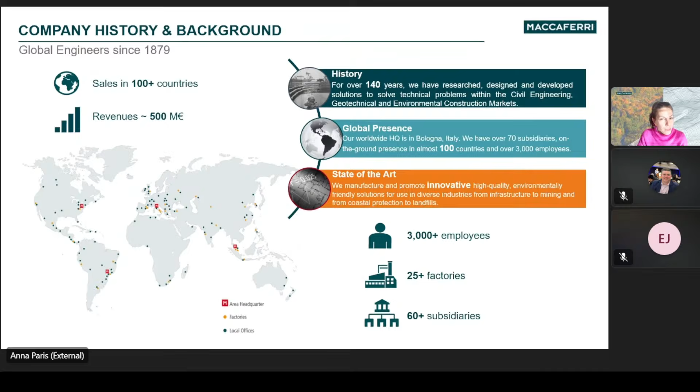The history of Maccaferri and erosion control started in 1894 with an innovative solution: the gabion basket. At that time, there was a riverbank breach, a damaged riverbank, and they came up with the idea of using these baskets, filling them with rock, and reconstructing the riverbank. If you go today to that spot in Casalecchio along the Reno River, close to Bologna, you will still see those gabions.

It's an old technology, and obviously the technology has evolved. You might see some rust on the wire because it was pure steel, but it's still there, still holding up, and very nicely integrated with the landscape.

Today, Maccaferri offers a very broad portfolio of solutions, from rockfall mitigation products all the way to pavement reinforcement with geosynthetics. We have a whole bunch of earth and soil retaining systems, from MSE walls to reinforced soil slopes with the green Terramesh, and then the classic gabion gravity wall. Today, we will focus on hydraulic works and a software that can support the channel erosion protection design.

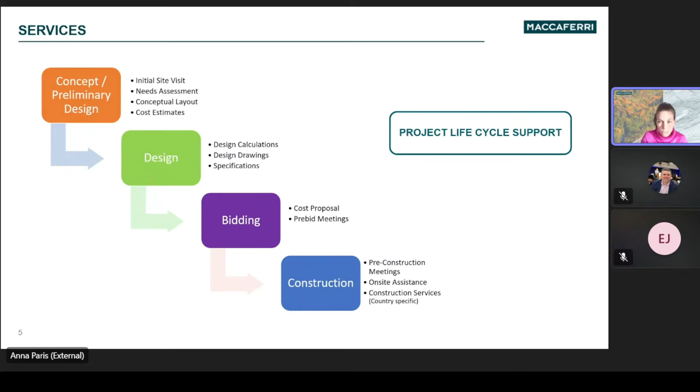Today, our focus is to discuss the software we have developed that can help you find an effective erosion protection system for a channel. The software is called MacRA Design. We're going to go through a quick introduction, seeing the capabilities of the software, then go to the data workflow, and then jump into a live demonstration. I'll show you how to use the software, and you're free to try it yourself. I'll show you the link, and we'll do a little trial, a design example and comparison with riprap, and then we'll see a couple of recent projects we have done. At the very end, we'll talk about questions and answers.

Let me start with a guess. If you're here today, you have probably found yourself wondering, in one of your projects, what could be an effective way to protect a riverbank, a spillway, or even a small beach from erosion. Maybe you have just a little information on the geometry and hydraulics of a channel, and you're wondering how to estimate the erosive forces. Or maybe you have already built your 2D models and know the distribution of shear stress, but you're not sure what kind of erosion protection system to propose to your client.

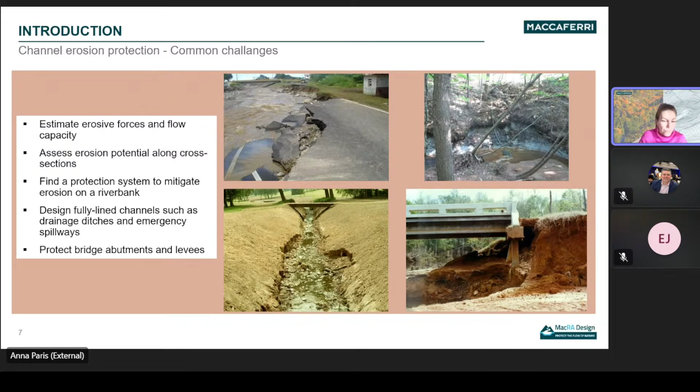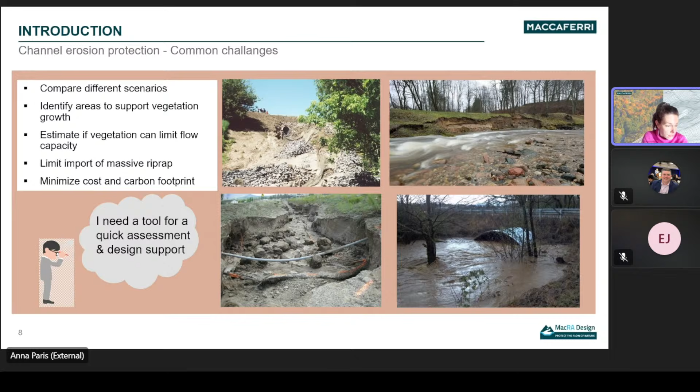And maybe you want to propose an alternative to riprap. Maybe you would like to compare different scenarios and identify areas in your cross-section that can support vegetation growth and enhance the ecosystem. Or maybe your calculation requires a big size riprap that's not locally available, and you're looking for a more cost-effective solution. With all these challenges in mind, we have developed this simple tool for a quick assessment that can support your channel design.

So the software MacRA Design can support either the design of channel and bank protection or grade control structures. Some of you may be familiar with the ancestors of MacRA Design. For many years, engineers have been using MacRA 1 or MacRA Studio for channel design and MacRA 2 for grade control structures. Now, MacRA Design is the latest version of this software, with many improved features, a wider material database, and a much more modern, user-friendly interface.

MacRA Design is a very simple and fast tool that can help you determine the erosive forces along the channel cross-section and compare the resistance of different materials picked from a database. You can combine natural and engineered erosion protection systems along the cross-section and compare the results with vegetated and non-vegetated solutions.

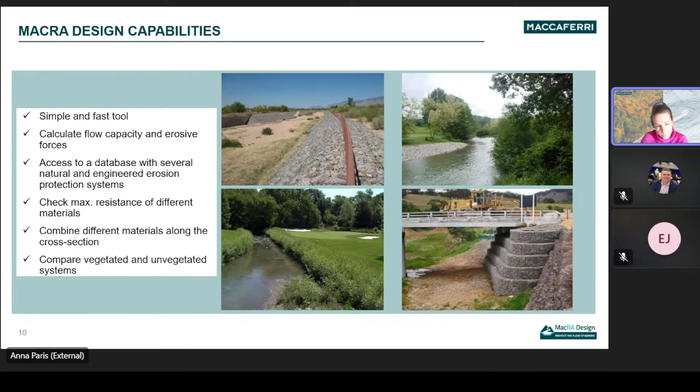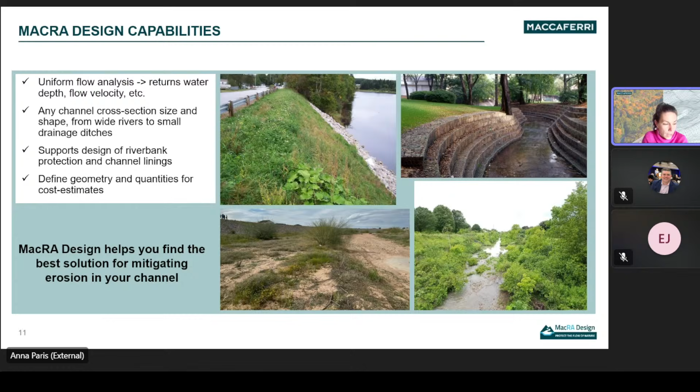The software runs a uniform flow analysis and returns water depth and flow velocity, allowing for flow capacity optimization, for example by modifying the cross-section geometry. You can model any kind of cross-section size and shape, from wide rivers to small drainage ditches. The purpose of MacRA Design is to support your design of riverbank protection systems and channel linings to mitigate erosion.

The software has a modern and intuitive interface. It requires only a few input data and returns results in a very nicely organized manner. It also creates a summary report available for download if you wish. You can pick between 10 languages and choose whether to use the metric system or the imperial system.

So additionally, and more importantly, MacRA Design is an online design software suite. That means you do not need to download it. You can use it just with an internet connection. You just need to create an account and you will have access to this tool and your own projects from anywhere.

In this way, you will always have access to the latest version of the software instantly, and there is no need to waste time searching for updates or take space from your computer memory. The software is available for use at edesign.maccaferri.com.

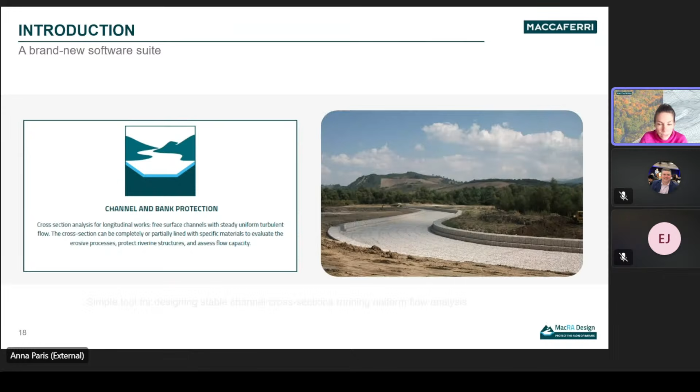So MacRA Design gives you both the options of designing channel and bank protection or grade control structures. Today we focus on channel and bank protection. Just remember, this tool is for designing stable channel cross sections running uniform flow analysis.

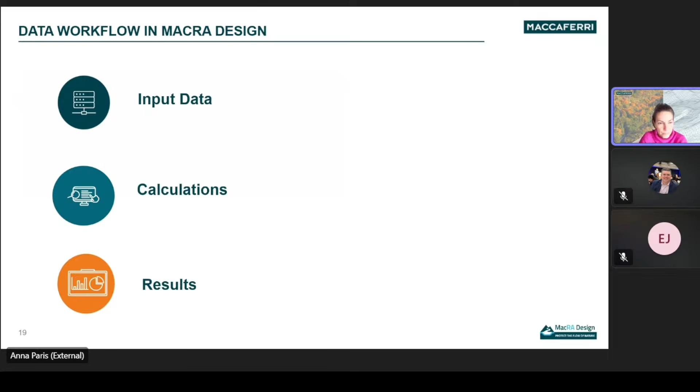So now let's check a little bit the data workflow, from input data, then the equations, the calculation, the approach, and then the results, how they look. So starting from input data, the information that the software requires is the geometry of the cross-section, some hydraulic data such as discharge and the slope of your channel in that area, and then you will need to associate to each part of your cross-section a certain material.

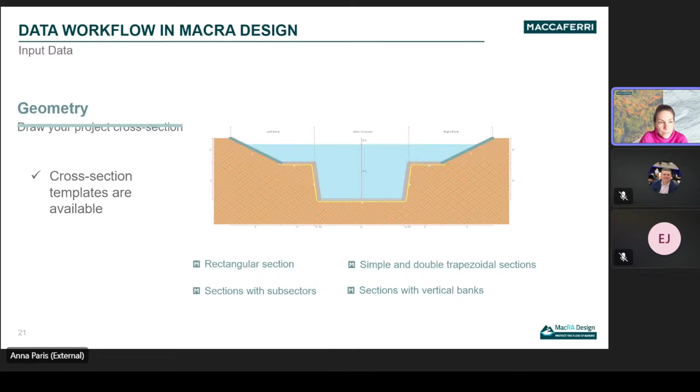Starting from geometry, basically the software offers some templates you can click on, and then you can start from that one and modify it. That's the first step. Then you will need to add the flow rate and the channel bed slope. And last but not least, you will need to associate each part of the cross-section to a certain material. There's a database inside that is divided in 3 categories: natural soils, natural vegetation, and protection systems.

So for natural soil and natural vegetation, you will see some different types of soil and vegetation, and the information that the software has in the database, in terms of shear stress and Manning's coefficient, comes from literature. On the other side, for protection systems, you will see different engineered systems, such as the option to select riprap, or different products for erosion control systems or earth retaining systems.

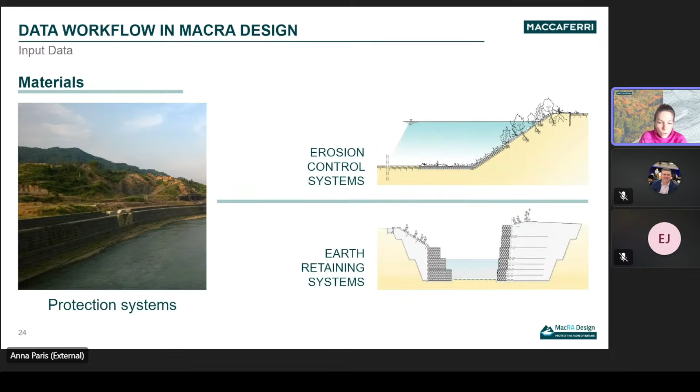Starting from erosion protection systems, there's a product inside called Maccaferri MacMat, a turf reinforcement mat. This is the type of product you would use when you have a mild sloped bank that is stable from a geotechnical point of view, but needs help with the erosion. It's kind of a soft armor vegetative solution.

The product itself is made with steel double twisted wire mesh, and has a 3-dimensional polymer matrix all around. This supports vegetation growth through it and works together with the vegetation to prevent erosion. This product is typically used in the upper part of the bank, on levees or small drainage ditches that are dry most of the time and carry water only during storms. So you need an environment where the vegetation can grow through it.

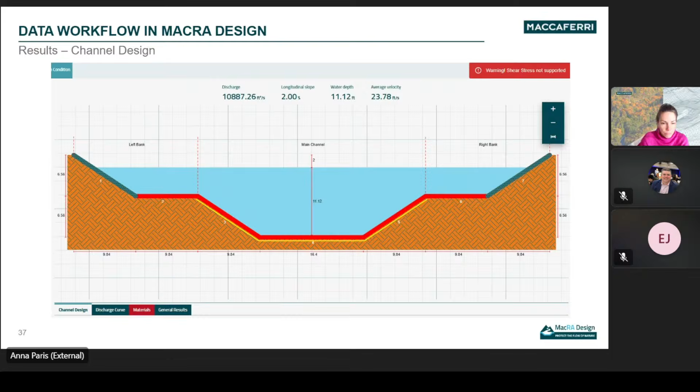And then you can go inside the material tab and check each part of your cross-section, what's going on in each part of your cross-section. What is the applied shear stress, the calculated shear stress, and allowed. And if it's red, typically the calculated is higher than the allowed. So you need to work and try to find a better product, a better solution.

Okay, so now let's jump in the MacRA design live demonstration. Let's try it. Feel free, if you want, to go on the website edesign.maccaferri.com and click on MacRA design. You can sign up if you haven't done it yet. Pretty quick, straightforward process. And then maybe you can follow me as I demonstrate the software.

So let me share my web page. So, share window. All right, here we go.

So when you log in MacRA, this is the page you will land. So basically, here you see a list of recent projects. These are projects I worked on before. If you're new, you will see nothing here, just new project right here. On the top left, you have open. So in case you want to open a certain file from the cloud, or even if you have downloaded a file, you can open that from there.

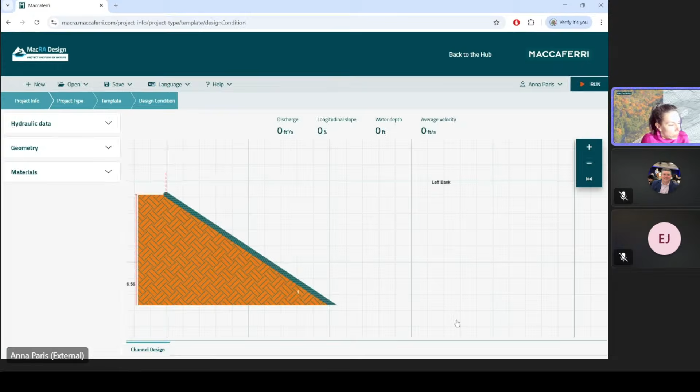Then you click next. Here you're going to choose either channel lining protection or grade control structures. For today's demonstration, we'll focus on channel lining protection. We click next. And then here you have available different templates, different cross sections. You can pick whatever is close enough to your project cross section. So let's say this one, trapezoidal. And then I'm going to select the unit system imperial. You can choose metric if you want. Now we go next. And here we go.

So now you see on the left side, you have all the drop-down menus where you need to add information. So in this case, you can select discharge, and then you can add the value of your flow rate. You can also potentially create an automatic discharge based on your cross-section and the freeboard. It will automatically calculate the discharge for that freeboard. But let's leave it like that for now, freeboard, and then longitudinal slope. So this is how steep your channel is in this area.

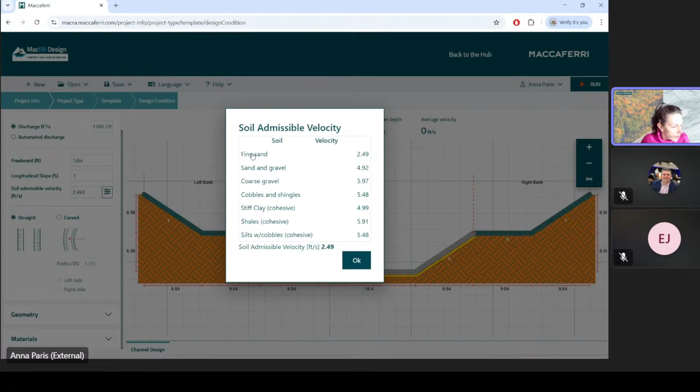Let's leave 1%. Then soil admissible velocity. So this is more what kind of soil you have on site. If you click here, it gives you different options, from fine sand to cobbles and shingles. If you don't know exactly what you have, the most conservative is fine sand because it's the most erodible. So you will select fine sand. Okay.

Then you could choose to design a straight channel or a curved channel. Let's say you're designing the outside bank of a stream that is being eroded. You need to fix it. You will choose curve and then add the radius of curvature of that bend. For now, let's keep it straight. So now we are done with the hydraulics, and now we're going to go to geometry.

So geometry, here you can see in this drawing, each part of your cross-section has a number: 1, 2, 3, 4, 5, 6, 7. So when you select sector 1 from this drop-down menu, it means you are working on this. Now you can change the geometry, for example. Instead of 1.5 to 1, I can choose 3 to 1. And then boom, it will immediately change it.

And then you can go back and zoom the right way. Zoom in with these arrows, plus, minus, or this double arrow will just zoom in the right way. And then you can change the height. You can put the height you want, let's say 7 foot, and it will change it. And so on. For each part of your cross-section, you basically define the geometry of that.

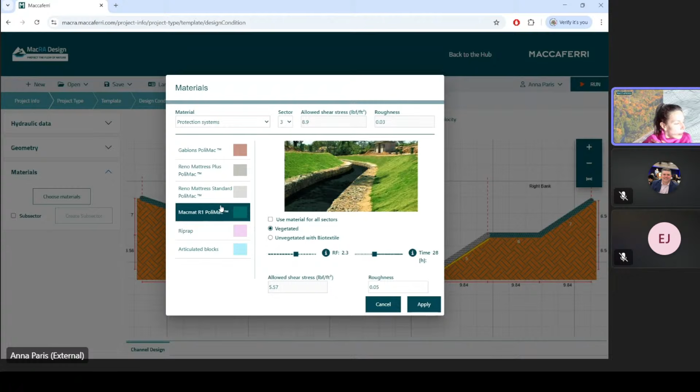Okay. All right, next, let's take a look at the Reno Mattress Standard. So Reno Mattress Standard, you can select the 3 thicknesses and then different sizes of rock. Let's check the Reno Mattress Plus because it's similar but has more options. The Reno Mattress Plus has 3 thicknesses. So thicker mattress means higher allowable shear stress. Okay, 6 versus 9, 9 is 11.

Then you can choose the rock D50. So the typical D50 for Reno mattresses that are either 6 or 9 inches would be 4 inches, because the rock would be typically well-graded rock between 3 and 5 inches. So 4 inches. In case you have a little bit smaller rock, you can select that, but that's the typical D50 for rock. So bigger D50, also higher allowable shear stress.

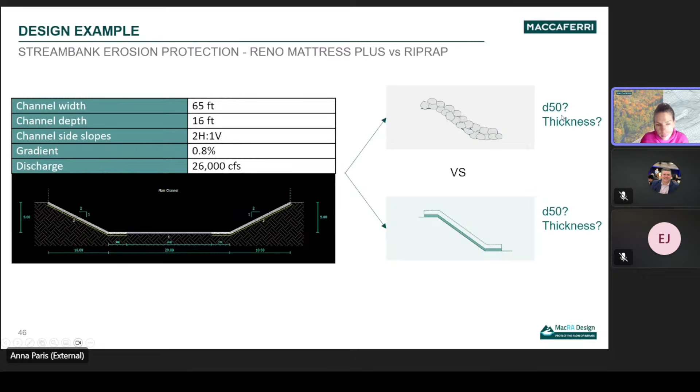to design an erosion protection for the banks of this channel that has a trapezoidal cross section, 65 foot wide at the bottom, with a depth of 16 foot. The banks are at 2-to-1 slope. The gradient is 0.8, and the flow rate is 26,000 cubic feet per second. We're going to design a protection on both sides. One is going to be with riprap, and one with the Reno Mattress Plus. And we're going to try to find out what's the D50 and the thickness that works, okay?

As you may notice from this cross-section, the bottom of the cross-section is divided in 3 parts. It is divided in 3 parts because realistically, when we protect the banks, we also protect the toe of the bank because we want to prevent undermining. So with the software, we want to simulate that we're going to protect, in this case, 9 foot. In general, the rule of thumb is if you can estimate the scour, the toe protection should extend 1.5 to 2 times the depth of the scour that you predict. So in this case, we simplify and assume 9 foot. So on both sides, 9 foot toe protection.

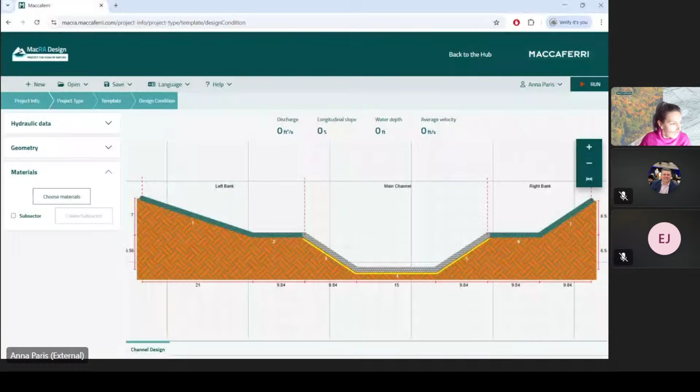Now let's go back to the software. Okay, so just to simplify, I already prepared files. So let's start with the Reno Mattress Plus. This is the cross section. We have 26,000 cubic feet per second, 0.8 is the longitudinal slope. We have a cross section with 2-to-1 banks. You see number 3, 2-to-1. Height is 16 foot. Both sides are the same, so 3 and 5 are the same. And then number 4 is the bottom of the channel, and it's 65 foot wide.

Now let's go to materials. We selected the Reno Mattress Plus. In this case, we selected 9 inches with a D50 of 4 inches and coefficient of uniformity 1.5. So we are in the order of allowable shear stress of 9 something, okay? We have this along the banks and at the toe. How do we do this at the toe? You click on subsector here. When you create the subsector, it will ask you which sector of the channel you want to divide in multiple parts. In our case, we did it with number 4.

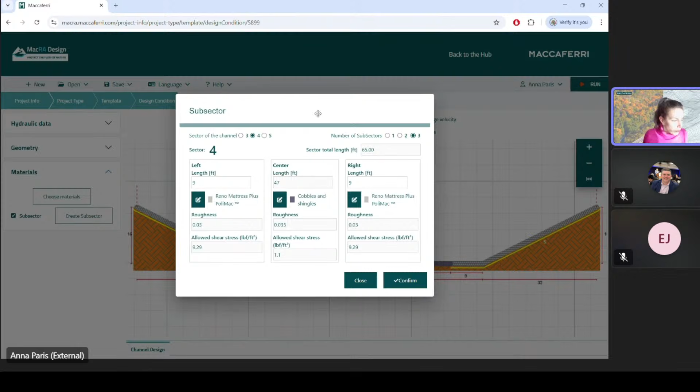Then on the right side, it asks you the number of subsectors, and we said 3 parts. Now you have left, center, and right. You put the extension on the left, the extension on the right, and then you select for each of them the type of material. In the middle of the cross section, we selected cobbles and shingles. That's because typically when you have a pretty wide natural channel, you're not going to line the entire channel. You're going to leave some natural material there, allow some scouring, but make sure you protect the toe of the banks.

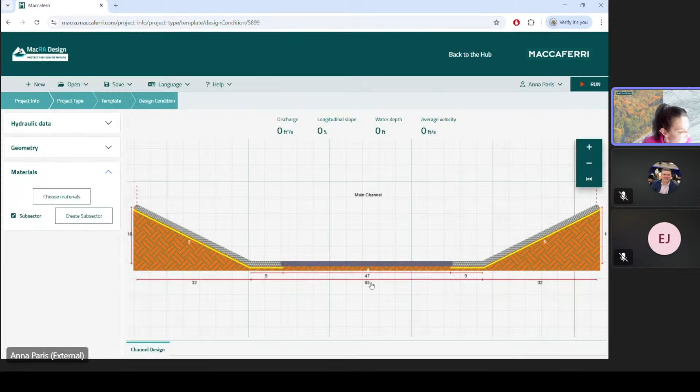So now we have this cross section, and when we click on run, top right, the software will run the calculation and tell you right away the water depth and the average velocity, again, using uniform flow analysis.

And then it will give you a warning sign if there's an area where the shear stress is exceeding the allowable shear stress for that material. In this case, the only area is the middle of the channel where we have cobbles and shingles.

So now, at the bottom of the software, you see different tabs. If I click on materials, that is red, it will show you for each part of the cross section the material you selected and the calculated shear stress versus the maximum allowable shear stress. As you can see here, we are in the order of magnitude of 9 something allowed versus 5 something. So we have like a safety factor of about 1.7.

That could be good. The safety factor means how much bigger the allowed shear stress should be over the calculated. It's up to the designers. It depends typically on the consequences and the risk associated with a failure. So typically, for important rivers, big rivers, you want a higher safety factor. If it's a small drainage channel, maybe you can use a smaller safety factor, or it depends, okay? These are just raw numbers calculated and from the database.

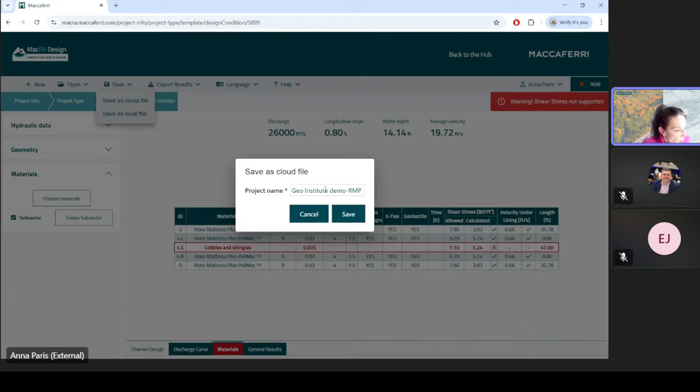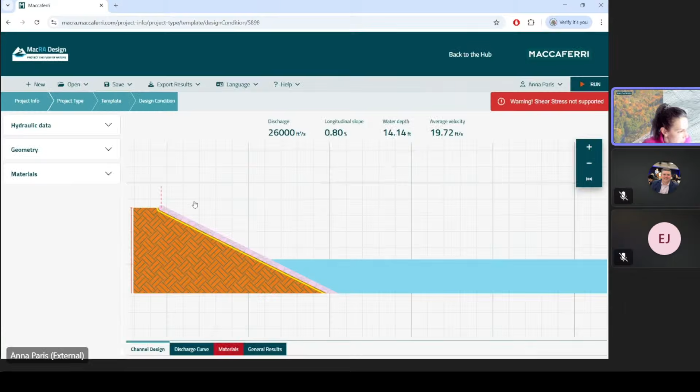Now, if you're doing the calculation right now, what you could do is basically save as a cloud file to keep the same cross section and save it with another name, and at that point you will have the same geometry, and you're just going to change the material along the bank and at the toe to riprap. Now I'm just going to quickly open the other file that has the riprap to jump to the solution. So here you can see the results.

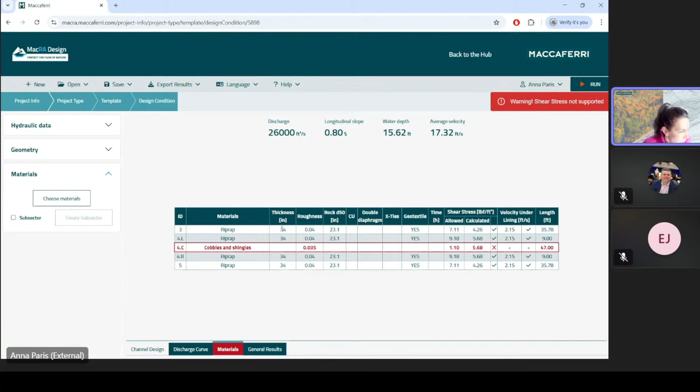In this case, for riprap, we selected a D50 of 23, and that will return an allowable shear stress that is similar to the other one. So we are comparing apples to apples in terms of safety factor. So now we have riprap 23 inches D50, and when we check the materials here, it tells you the thickness, the D50, and allowed and calculated shear stress for riprap, and the same for the middle.

In this case, you probably have noticed that if I go back to the channel design, the water depth is higher, and the reason is because now you're using a bigger riprap, so the Manning's coefficient is higher. That means the water moves slower, but the water depth is higher. So that's why the applied shear stress is slightly different.

Okay, now I want to go back to the PowerPoint to show you the results comparison and share some thoughts on that. So let me share the PowerPoint again. This one. Okay. So let's check out a table that summarizes the results here.

So here you can see the summary for the Reno mattress plus. What we just saw, you see the bank protection, how it returns visually. It's very intuitive. It shows you the water depth, the average velocity, and then for the materials, it shows you the summary for the shear stress. So here we have the 9-inch thick Reno mattress plus with the 4-inch D50. And here are the results for the shear stress.

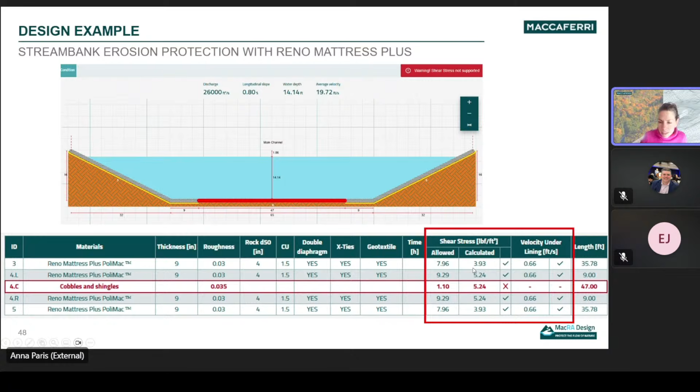Now let's take a look at the riprap. You have 23 inches D50 with a minimal thickness of 34, 35 inches. And we are in the same kind of allowed shear stress. Now, if we compare them in a table, let's assume we are protecting a reach of the stream on both sides for a length of about 330 feet, and the bank protection with the toe would be 45 feet long on both sides.

If you do the math, you will come up with about 3,300 square yards of area that needs to be protected. Now, let's compare the riprap result to the Reno mattress plus. In the case of the riprap, the D50 would have been 23 inches. For the Reno mattress plus, you have 4 inches D50. The rock range depends on the guidelines you follow, but it would be between 6 inches and 34 inches, whereas for the Reno mattress, 3 inches to 5 inches rock, well graded.

For the riprap, you may even need to create multiple layers of gravel filters below, but this is simplifying the calculation.

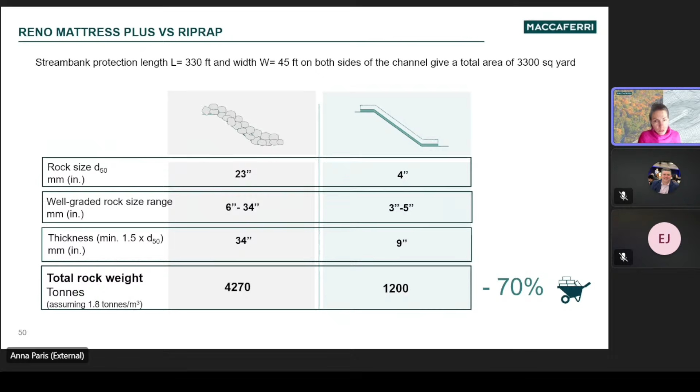If we do the math calculating the rock weight and compare them, you'll see that for the riprap we need about 4,270 tons of rock versus about 1,200 for the mattresses. If you do the math, this is basically about 70% less rock needed if you use the mattresses.

Now, if we convert this rock weight to number of trucks, assuming one truck carries 40 tons, you'll need about 100-something trucks for the riprap versus only 30 for the mattresses, plus maybe a couple trucks for the mattress material itself. So it's about more than 70 trucks less.

Now, if the job site is close to the quarry or wherever you source the rock, that might have a certain cost impact. But if it's far, that could change the overall cost of the installation. So something to keep in mind.

Also, if you compare the two installations, typically having a mattress is more accurate because you make sure your mattress is fully filled, and it's very clear to define that. Whereas with riprap, to make sure you have a homogeneous layer when you have big riprap might be a little more challenging, even more if it's underwater.

In terms of maintenance, riprap, because it's loose rock, may move around. So after an event, when you go do inspection, you may notice the rock has moved because it's loose. You never know about some scouring or movement.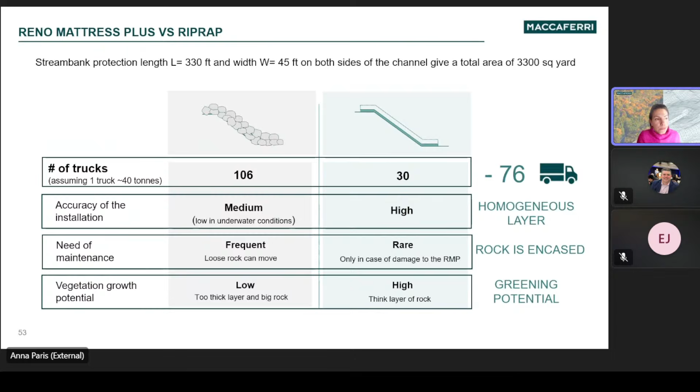So overall, using mattresses, Reno Mattress Plus in particular, helps reduce the volume of riprap. So in case your design requires gigantic, very big riprap, you might want to consider using mattresses to reduce the cost.

Now a couple of projects, and then I'm done, just to show you some examples. This is a nice project down in Louisiana, done with MacMat, to protect the upper part of the riverbank. That's a very good application for this product, where flow velocities are not that high.

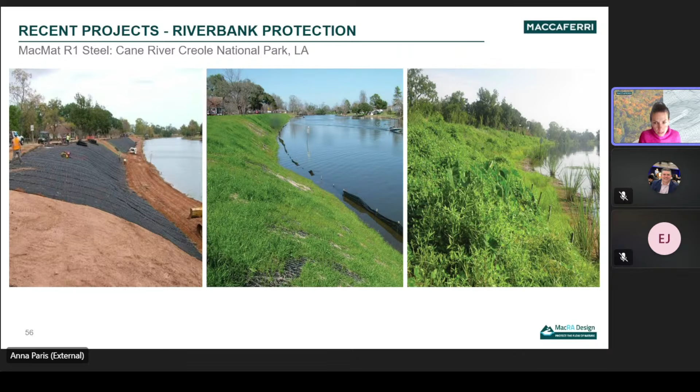Most of the time the water level is below the mat, so vegetation can grow nicely. Here you can see during installation of the mat, then in the middle when vegetation started growing, and on the right side when the vegetation is fully mature, you can't see the mattress basically — it's there, but you only see the vegetation.

Last but not least, a nice project down in Arizona, very dry climate, a new residential development around an arroyo and a wash. This is dry most of the time, but when the rainy season comes it can carry lots of water and lots of sediment. So it's important to channelize the water to be able to develop the areas next to it.

In this case, they created more of a rectangular cross section with a gabion retaining wall on both sides, and a mattress protection at the bottom to prevent scouring.

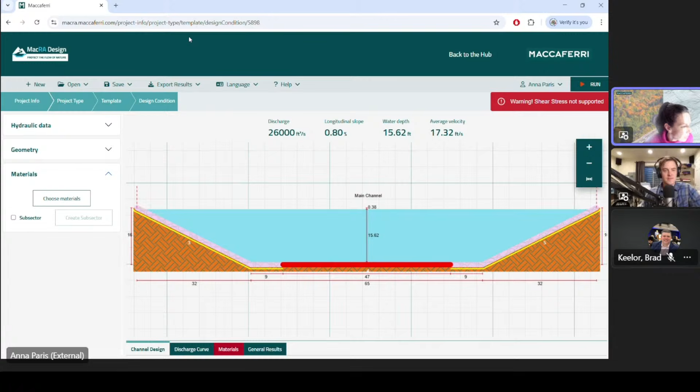Yes, actually, thank you so much—that's a very important thing I think I didn't mention. So here, once you run the calculation, you can click on export results, and the software will create a PDF, even a JPEG, summarizing the input data. It has a nice drawing, and then the summary of the results. So definitely yes, and this can be used in your set of documents you provide with all the other technical documents for your project.

I just wanted to clarify, what are the specific differences between Reno mattress and the Plus version?

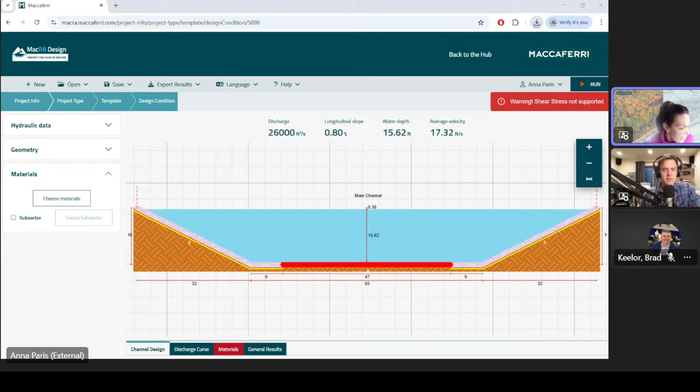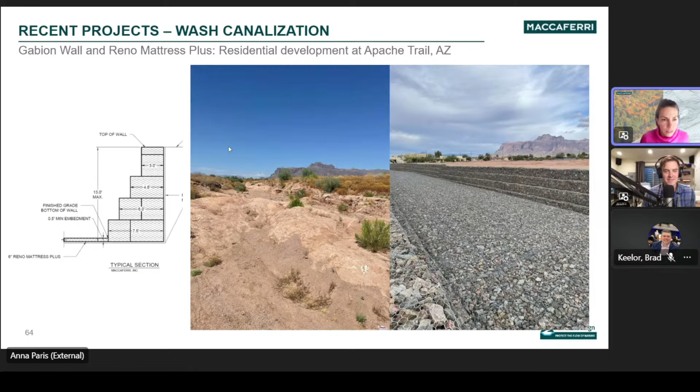Okay, let me stop sharing and go back to the slide that shows the two products, it's easier to explain this way. So the standard Reno mattress has the same kind of shape and diaphragm, with elements that are the same mesh just bent, and it has a double layer of mesh that prevents the rock from moving when the water tries to push it.

They both have that, but the difference is that the mattress Plus has a tie every square yard placed at the base, connecting it. It's a kind of freestanding tripod—you fill it with rock, and when you add the lid, you connect it with rings to the lid. That provides an even bigger confinement aspect to the rock.

Gotcha, okay, thank you. We have a question from the audience: do you have examples of products that have been used in a reach that was also having a fish ladder system installed?

That's a good question. I'm not sure if they're asking if the product was used for the fish ladder or if it's just next to it. I've seen some pictures from the past, but not recently. However, I've seen projects where I was doing surveys and saw salmon going upstream during the spawning season in September or so, so that channel might have had a fish ladder further upstream, but I'm not sure. There was a gabion wall there, but I didn't see the fish ladder.

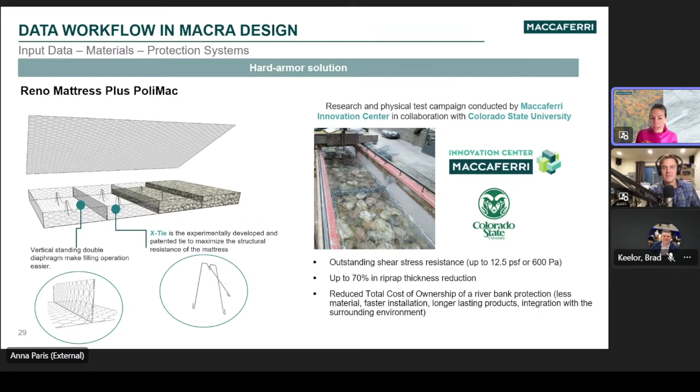Does this work for all soils, sands, that kind of thing? Yeah, so if the question is for the Mac mat, the TRM, the mattresses don't typically need to be anchored to the soil, because they're placed typically on a slope that is, let me go to a picture, 2-to-1 or 3-to-1, so not too steep. Sometimes, if it's pretty high, or there's a risk of sliding because of the type of soil, or if there's a liner underneath, you may want to have an anchor. We call it a gabion anchor at the top. So it's something that goes a little deeper, and the mattresses are connected to that, and that will help with the stability against the sliding.

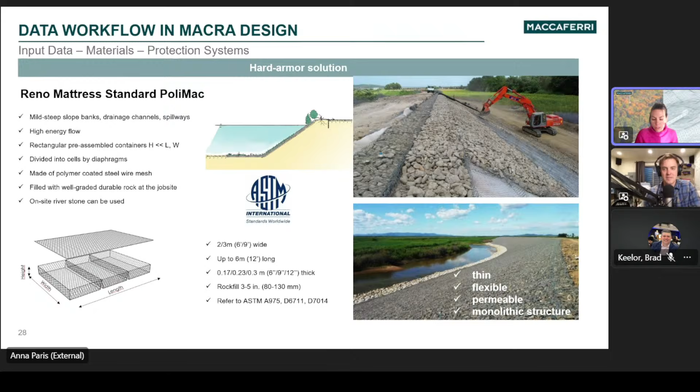The same with the toe. If you have a mattress at the toe that kind of pushes back your mattress on the bank, that also acts as a stabilizing component. This is for the mattresses. If it's the MacMat product that is basically just a mat, a very thin layer, then in this case, yes, you need some anchors.

Typically you can use, there are different anchors depending on the project, but what we call a J-pin, that is like an 18-inch rod that you can just pin down in the soil. Then it depends again on the soil, because if it's very sandy, the pull-out resistance depends. You can use that kind of anchor, or more of a Platipus anchor, depending on the soil condition.

But even in this case, the mats for riverbank protection, typically the bank would be stable from a geotechnical point of view. So there are minor anchors, not deep anchors.

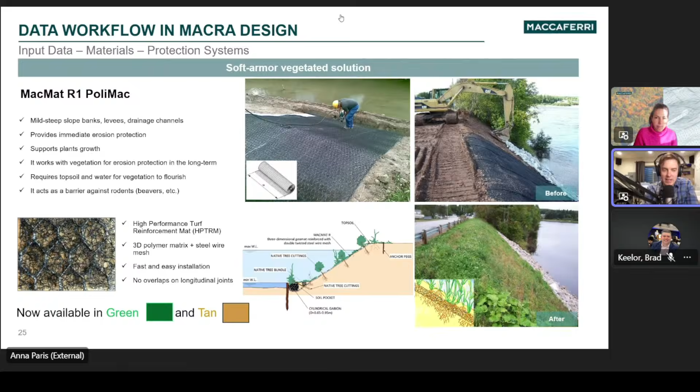Oh, Brad is telling me that he lost audio here. I can hear you. Oh, you can hear me, but we might have lost Brad. At any rate, I'm going to attempt to turn it back over to GI staff here. We'll see if this works. It doesn't look like it might be. Well, oh, wait, we might have gotten Brad back. Let's see. Oh, perhaps not. Any rate, thank you all. No, I'm back. Oh, he's back. There we go. I was going to have to go ad-lib an ending here, so I'm happy to have Brad back. It would have been amazing. Would have been something. You're pretty good at that kind of stuff.